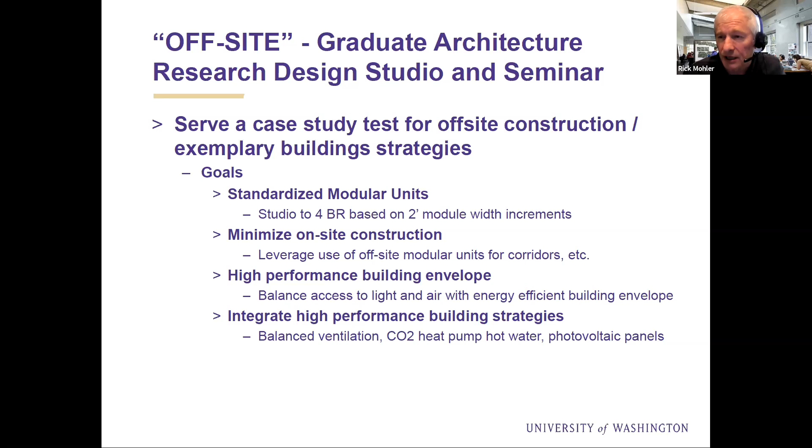And to integrate high-performance building strategies, including balanced ventilation, which provides continuous fresh air despite the fact that these buildings would have a very tight envelope, highly efficient CO2 heat pump hot water systems, and photovoltaic panels to generate on-site energy. We were pleased to have more than 24 participants, including affordable housing developers, architects, engineers, contractors, and modular unit suppliers.

This is a testament to the generosity of our broader community, willing to give their time and expertise to the education of these students. We had 12 students in the studio, and 5 of them, Alaena, Skyler, Stephanie, Kevin, and Juan, are going to present their projects here today, starting with Stephanie.

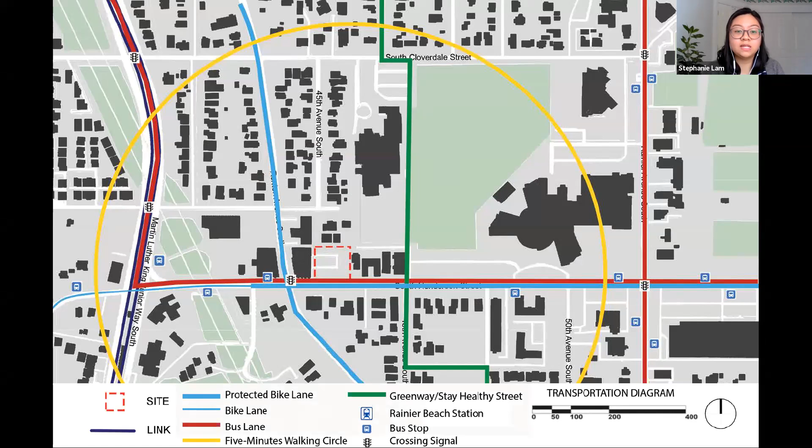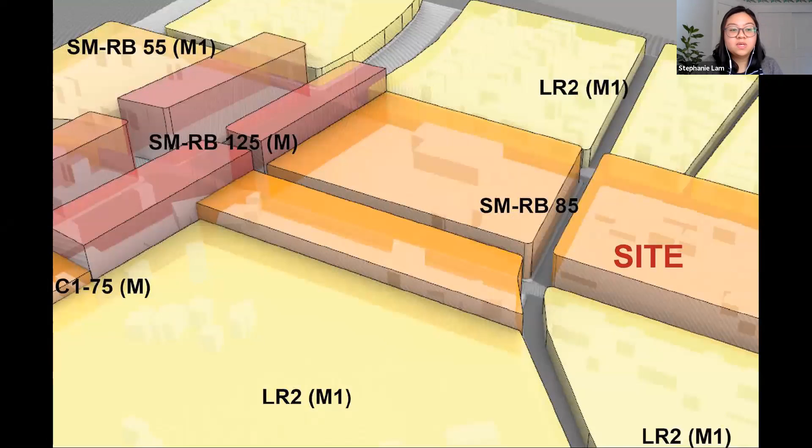Here are some views of its current state as an empty lot. The site's very close to the light rail with bike lanes along Henderson and Renton Avenue. Within walking distance, there are schools, parks, and a community center. The height limit is 85 feet with an FAR of 4.75.

It was important to provide places for the entire diverse neighborhood and a place working families can come home to. One of the big challenges was taking something standard, as Rick was talking about, modular construction, and making it unique to the site, creating more of a sense of place.

For my project proposal, it is about activating the edges, providing different opportunities for residents and for the surrounding neighbors. The next series shows some site forces carving out the max the project could go.

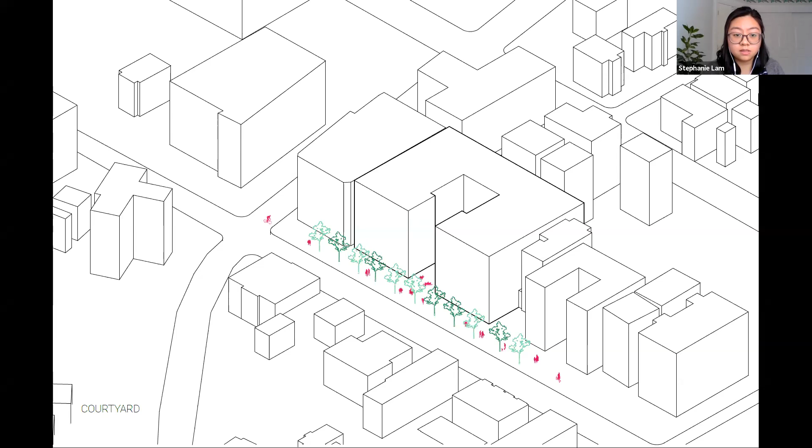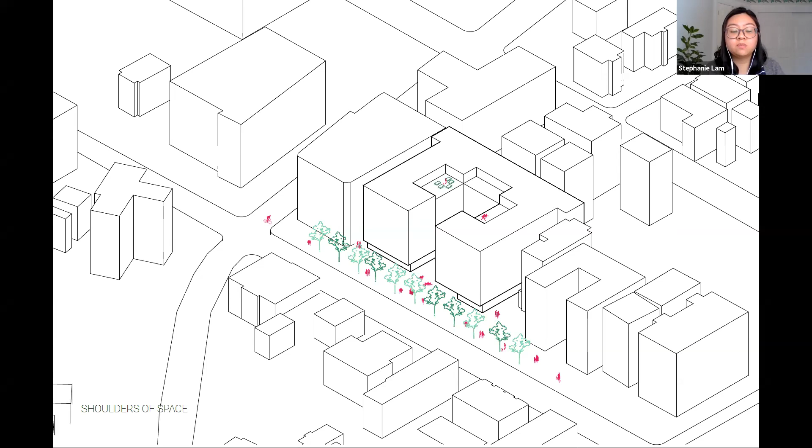Starting with the courtyard to provide open space and facing south for light, carving out the sides to allow light and air to the units, and then providing more intimate spaces on the rooftop and ground level.

For the studio, there was a constant back and forth between what happens above and below. At the ground level, there's more flexibility in where the community amenities and live-work units could go, and the overhang of the modular units above provided a covering down below for those spaces.

On the second level is a play area. Families can look into the play area from units above or as they are doing laundry, and units at this level can have a little space for privacy.

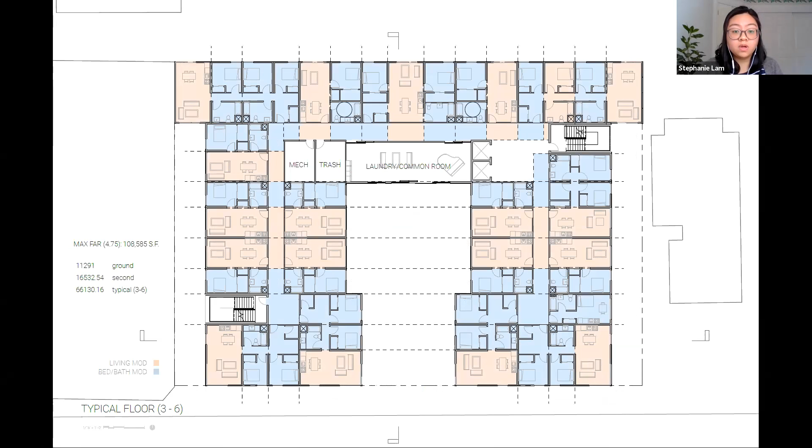For the units, the mods aligned in a way where there were 2 main mods, the living mods and the bed-bath mods, with the corridor included. Residents can also grow food in the community garden, which can support some of the businesses down below.

In section, you can get the sense of the floor-ceiling assemblies and how that might affect the overall height. In this section, you can also see the double walls, which also help with acoustics. It may be a little harder to break down the party walls for reuse.

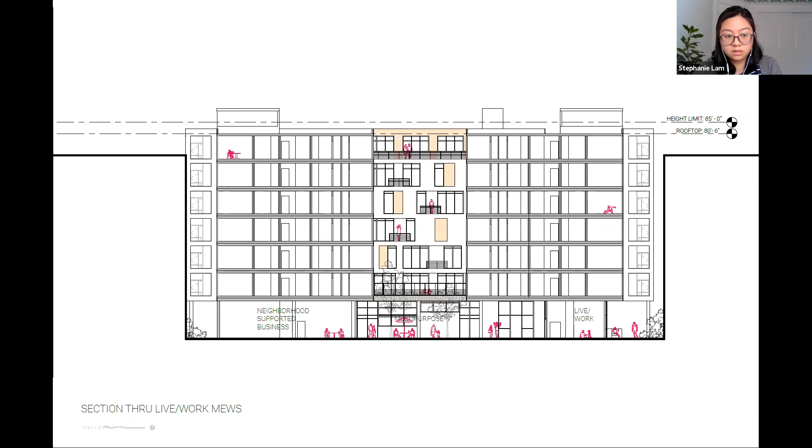In terms of elevation, there could be more opportunity to play with the facade elements and the proportion and patterns. It's also important to stack the units.

This shows what could be built on-site and off-site. The units above could be built off-site with a 54-foot long mod. The ground cores and podium can be built on-site, and flat pack elements of the common room could be shipped to the site.

For a tight air and water barrier, the exterior cladding could also be built off-site. As mentioned during review, it also helps to understand the manufacturing process, and in general, it would save a lot of time to frame and stack up.

Each mod includes these layers. There are mainly 2 window sizes, one for the bedroom and one for the living area.

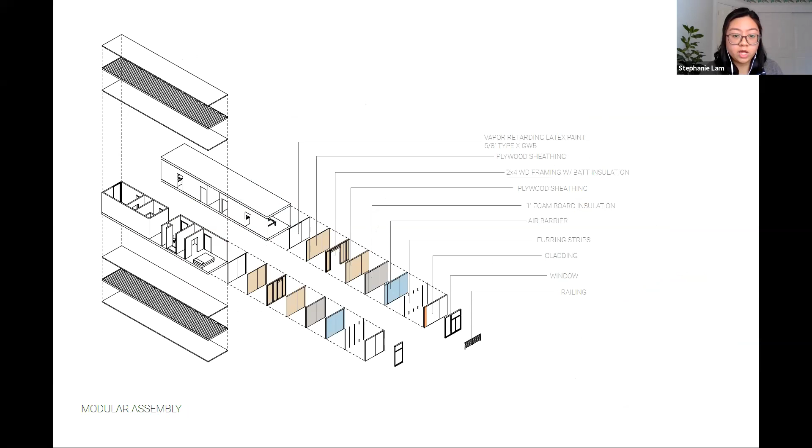The studio unit starts with a 12-foot by 24-foot mod, considering that the stud wall is spaced at 24 inches on center.

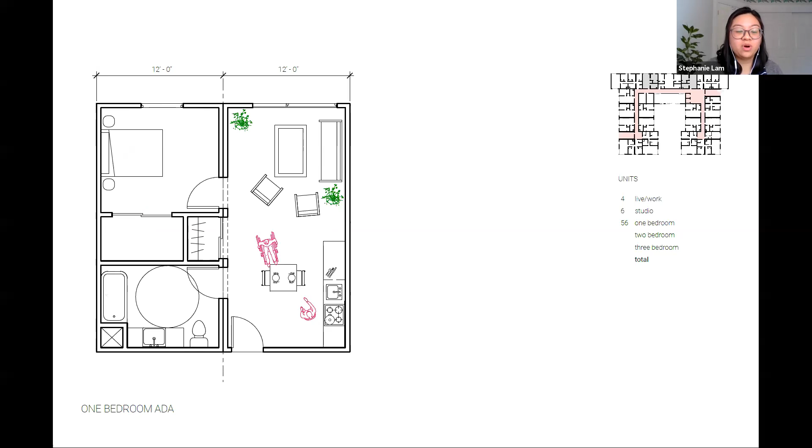For one bedroom, another 10-foot modular can be added next, or expanded to 12 feet for more space. There are mainly 2 types of 2 bedrooms. This is the corner with the living expanded to 14 feet and the bedroom expanded to 12 feet to provide more space.

And compared to the infill, these are for the units in between. And as the units grow, the bedroom sizes also grow to accommodate bigger families.

Each unit type has its own unitized energy recovery ventilator, allowing residents to have their own supply and exhaust of air. A lesson learned is that it could be placed closer to the corridor if it's unitized, for ease of access in future maintenance.

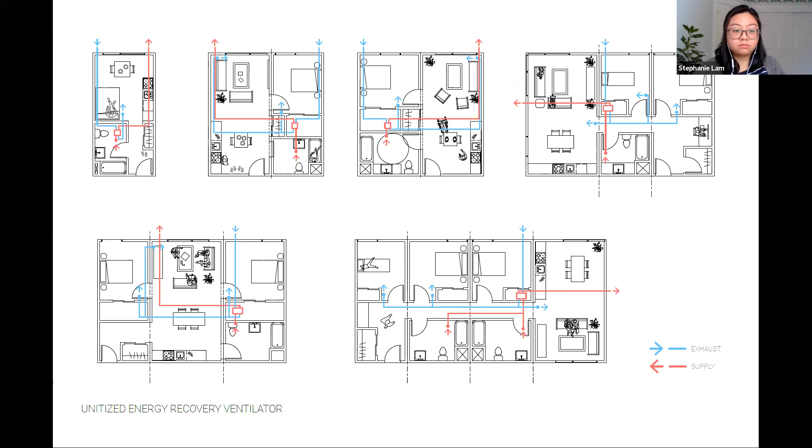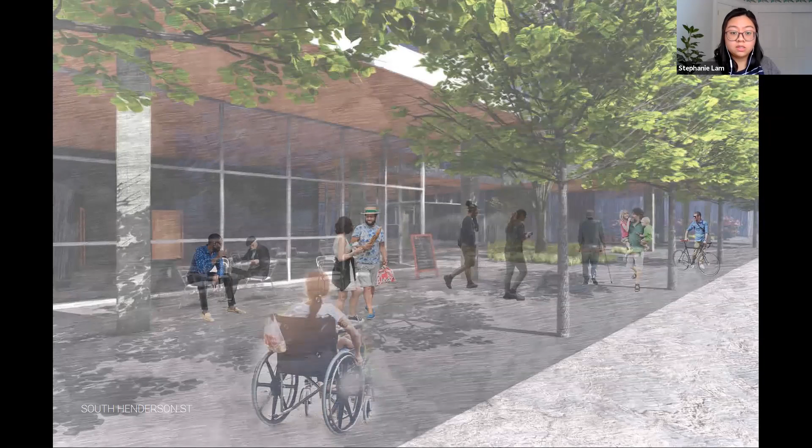Playing in the play area. Walking along the mews. Working in the covered workspace.

Up on the rooftop. Overall, the biggest takeaway is to consider collaborating with a team from the get-go, and understanding the manufacturing process is also important from a cost and time standpoint. Also finding the balance, or at least thinking about how to be most efficient with the use of space and creating a sense of place, which you'll see more in the next few projects.

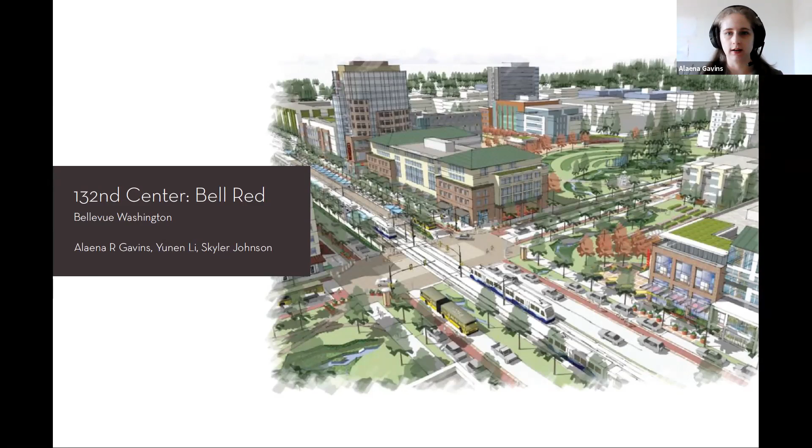Currently zoned as industrial use, the new light rail expansion has prompted new redevelopment to transform the area into a mixed-use urban area, and to reconnect nature through reestablishing creeks, rivers, and parks within this urban area.

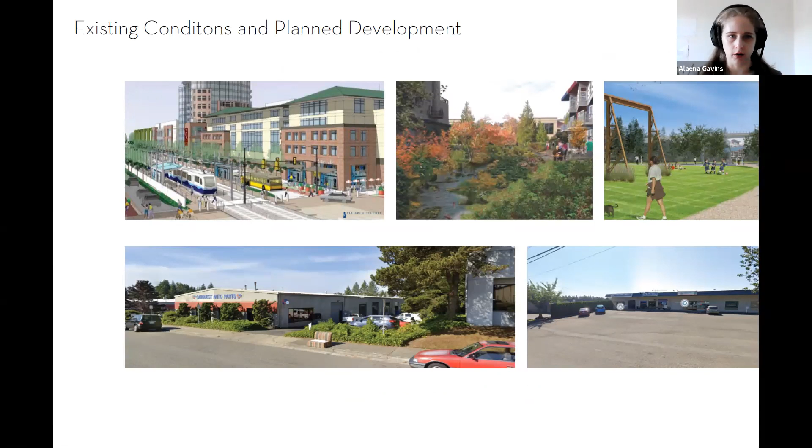The anticipated zoning on our site allows for up to 150 feet of construction, but our project, due to the construction type, was actually built shorter, roughly 80 to 95 feet. Most of the buildings to our south are still zoned for building heights shorter than what our project proposed.

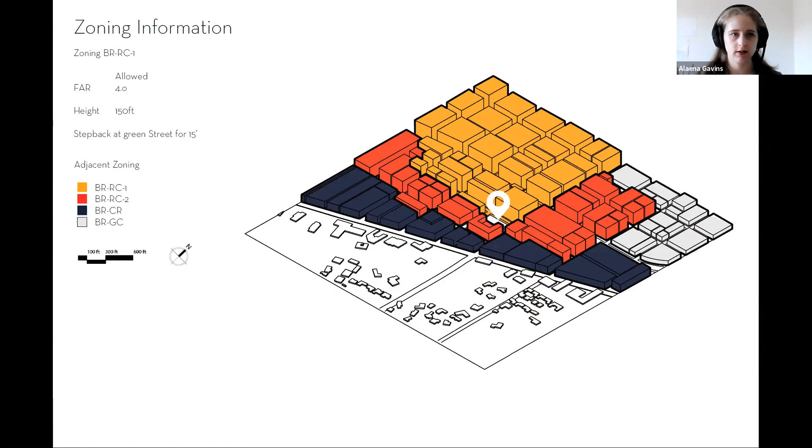The proposal that I developed was actually called the Belleville, and the main goal of this proposal was to deinstitutionalize the process of being and living in affordable housing.

This is achieved 3 ways: breaking down the massing through urban design techniques, reducing formality through window size and placement, and through a focus on community and the quality of space.

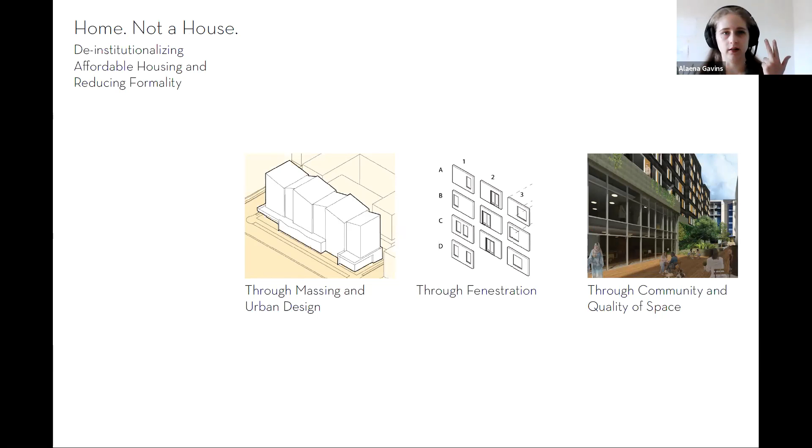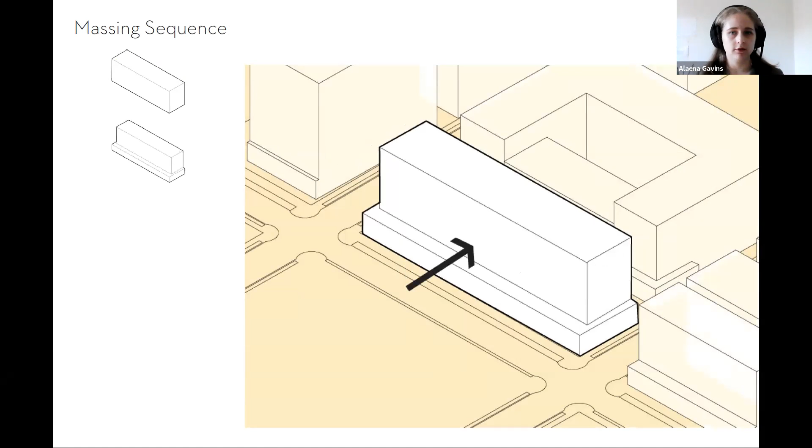Starting with the massing, it's a basic form of a bar. This is then pulled in 15 feet above to reinforce the green street.

This is then broken up through pulling in segments of the mass, and reinforcing these segments through roof variations. Lastly, the podium is articulated to enhance the experience of pedestrians walking by.

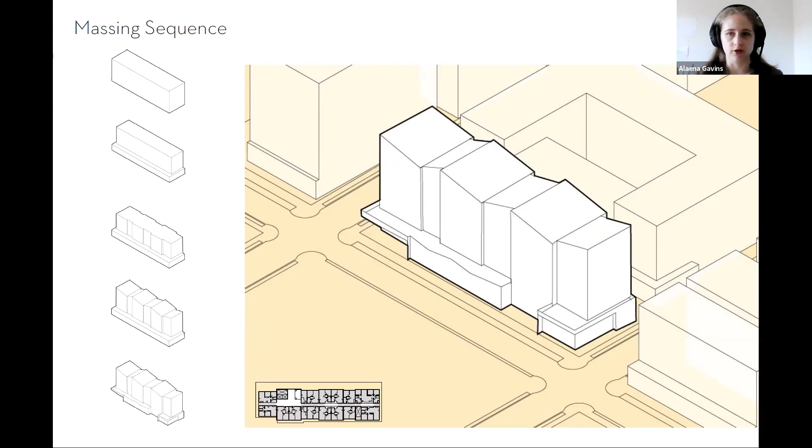These strategies combined create an informal feel to the exterior. The construction is made up of 3 parts.

The podium is made up of concrete, which is site-built construction, differing from the body, which, as with Stephanie's project and the rest of the projects, is 100% prefabricated modules. In this case, the articulated roof is also prefabricated, but it comes to the site in parts to be assembled.

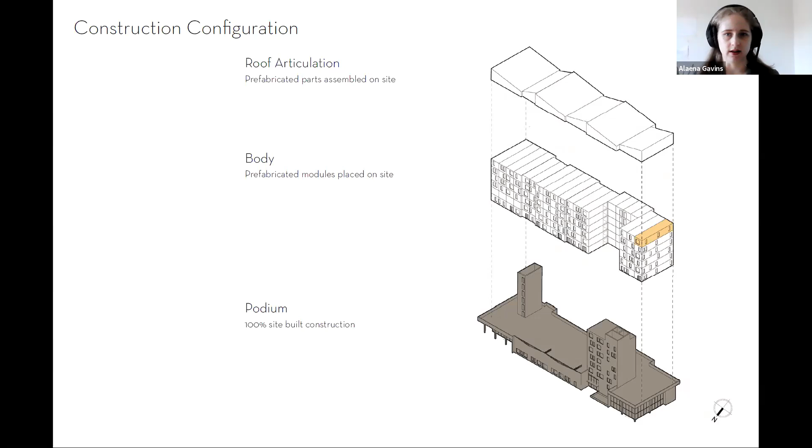Taking a closer look at one of the individual prefabricated modules, the exterior window wall, you can see it's notated A, B, C, D, 1, 2, 3.

What that does is it allows the window wall to be swapped out for another unit to create a varied look on the exterior, which would break up a potential grid of windows—using the modular technology to create artistic variation.

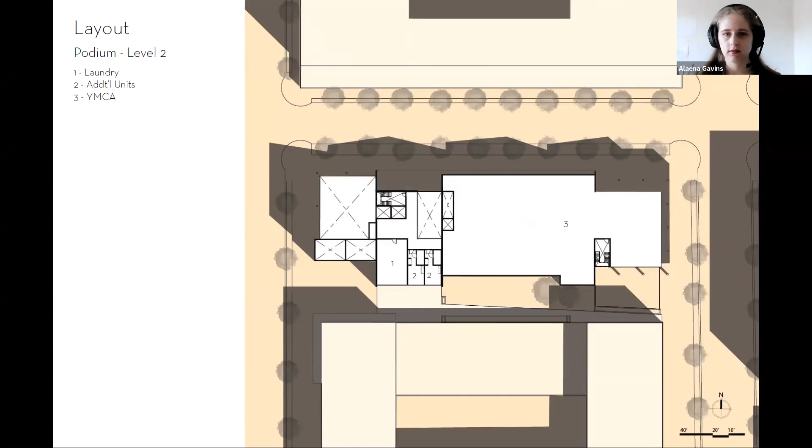Above is largely similar, with the addition of 2 units and a communal laundry space. Then on the 3rd floor and above, these are all apartments.

On the 3rd floor, these include private terraces, but then on all of the levels, there is a small community breakout area for resident use.

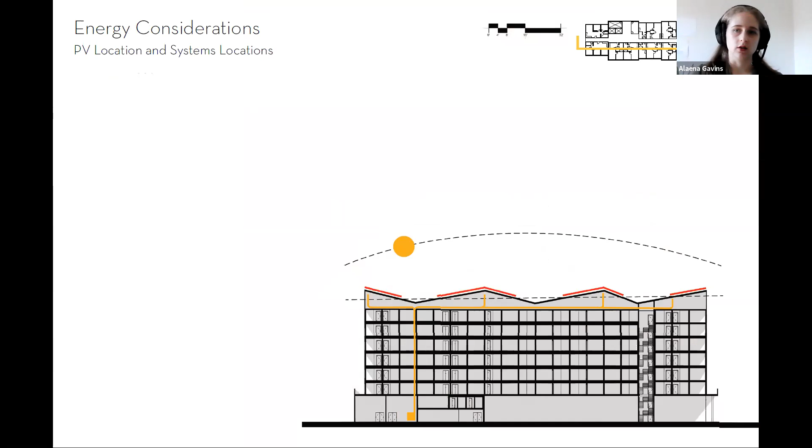Some of the key considerations for exemplary building program focus that we had was including solar, which is located on the peaks of this articulated roof.

Another consideration was the energy recovery ventilation. Unlike Stephanie's proposal, this consolidates the ERVs into 3 central zones, maintaining redundancy while reducing the number of ERV units.

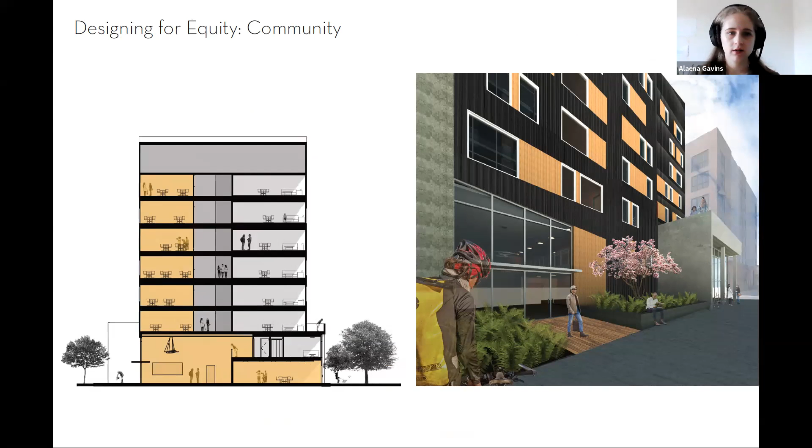Lastly, this proposal is defined through equity. There is a continuation of resident public space from the entry, through to the lobby, and out to the extended community space of the mews.

Notably, all of the units in this proposal are standardized ADA units, to ensure that those who need ADA accommodations can have them.

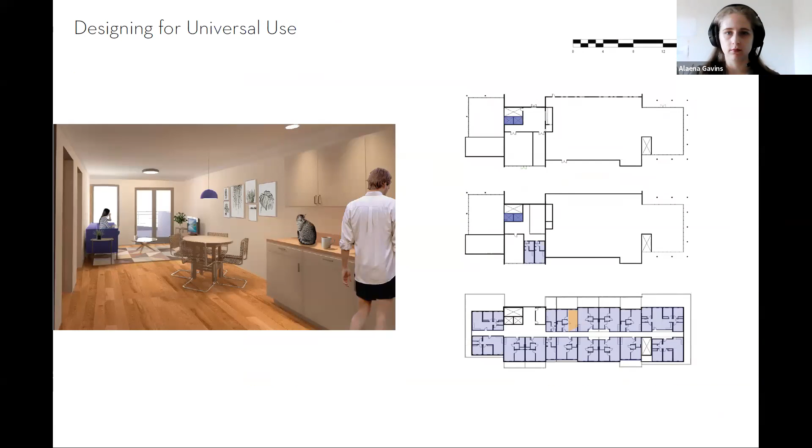While there is the inclusion of 2 and 3 bedroom units for larger families, the majority of the units are 1 bedroom units, for a total of 99 units. This is actually just under the initial architectural proposal that we started with.

Here's the studio plan, made up of a single module. And then these are the variations of the 1 bedrooms, which are each made up of 2 modules.

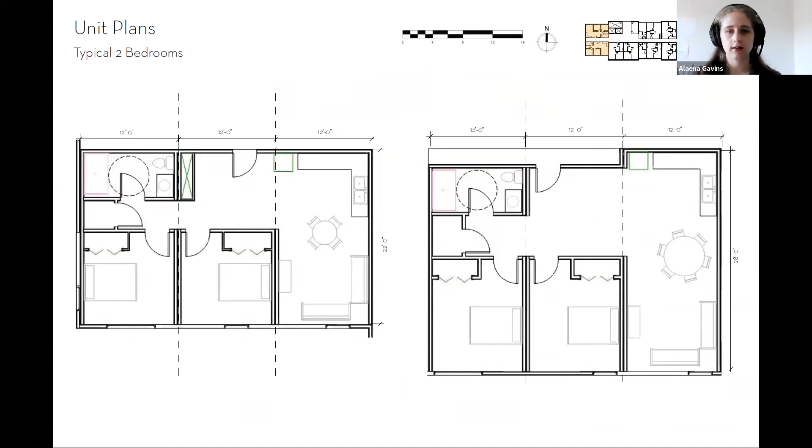And then the 2 2-bedroom units that we have. And lastly, the 3-bedroom unit, which has 4 separate modules.

All these considerations lead up to a proposal that redefines affordable housing and what that experience can be. Thank you very much for coming, and I will pass it on to Skyler.

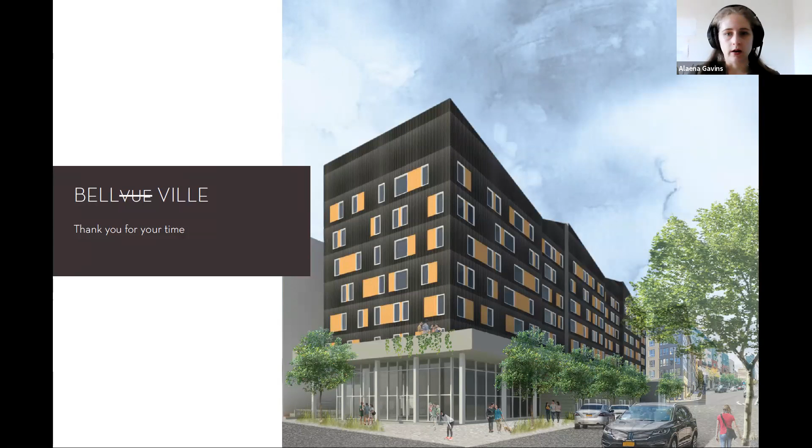Hello, everyone. Thank you for coming today. My name is Skyler Johnson, and my project is at the same site as Alaena's. It's aptly named the 132nd Bel-Red Mod.

I wanted to investigate how modular construction could find efficiencies in the standardization and how to channel those savings into ideas that would give back to the residents. My proposal accounted for nearly the same amount of units as proposed by the developers previously.

The rectangular massing is derivative of the zoning setbacks and stepbacks from the Green Street corridor, as well as to provide adequate space for the private mews between the other residential building.

Entrances were pulled off the street to highlight the primary uses. The lobby extends through the building's width to provide a feeling of transparency from the Green Street to the private mews, and the community room and the YMCA are also pulled back.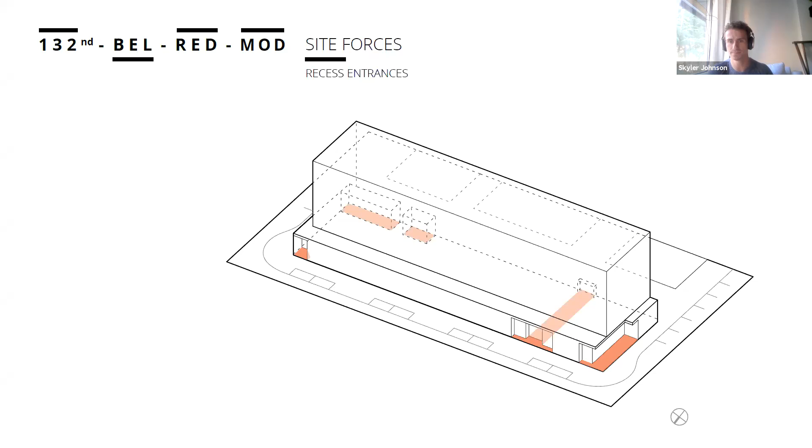The building envelope would be drawn back to the vertical circulation, like the stairwells and the long corridors, providing access to light to the transitional spaces.

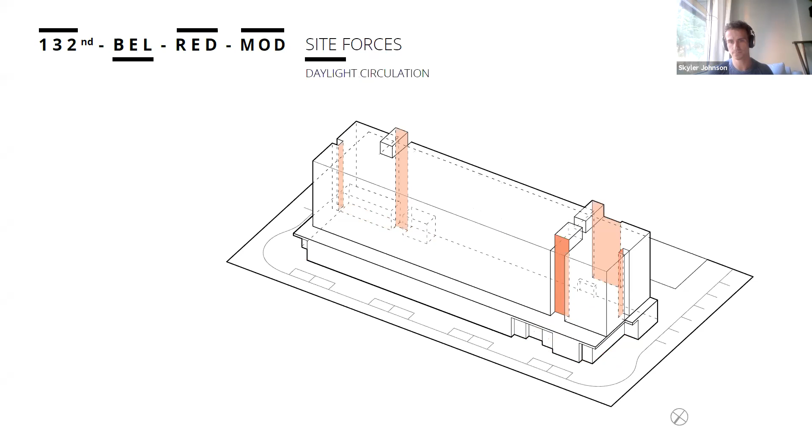Beyond the site forces and zoning, the concept for the building is derived from primary chunks that would be carved out of the massing, leaving exposed bright insets.

Locations are chosen in a way that would reveal the modularity of the project, and the colors selected are bright earth tones.

Each inset would be anchored by a community module implemented on each floor, drawing residents through the building, thus encouraging the development of a sense of community.

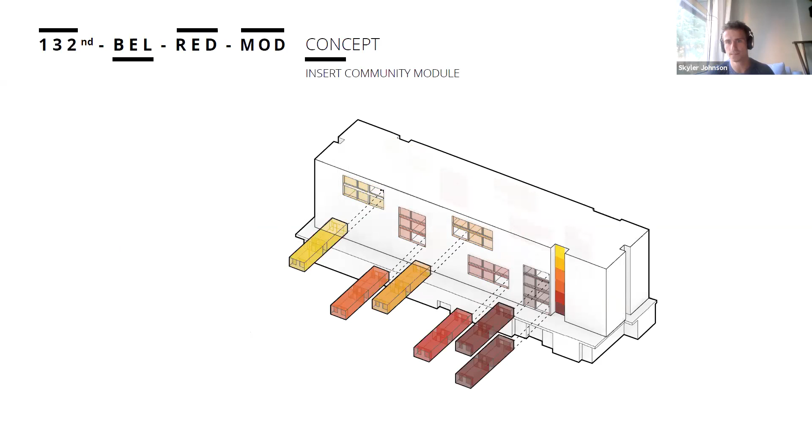Communal balconies and outset window frames would create a secondary articulation on the building's exterior character.

At the ground floor, the building's lobby projects from the green street through the width of the building, forming a relationship to the private mews. Residents from this building and the one to the south can spill into the green space at their leisure.

Enclosing the space on either end is a car park to the west for trash and mechanical services, and a children's play area for the YMCA to the east.

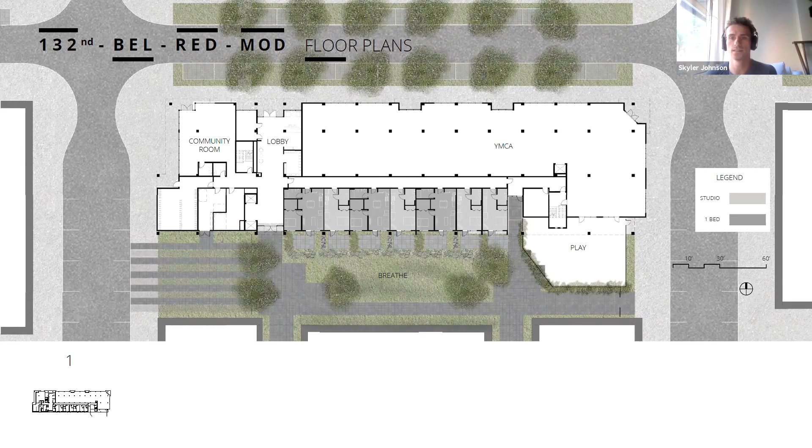The concrete podium will include the second floor, and floors 3 through 8 would be modular construction.

As we rise through the building, the community modules take the place of studios, allowing light to penetrate into each corridor. This is showing where the laundry room might be, having access to the outdoor patio space while residents wait.

Residents can build connections in these various community modules with others who take part in these daily activities, including interests like reading, gardening, or just taking time to be alone and be productive.

We had the ability to have deeper units by extending further into the mews, but chose not to, for the purpose of maintaining unit size efficiencies and to allow light to penetrate as deep into the outdoor space as possible.

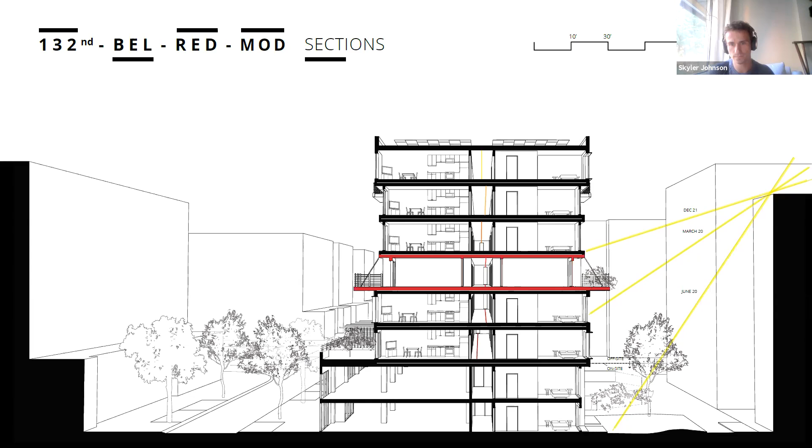Like many of these other modular projects, it begins with a concrete podium that's built on site. While the site is being prepared, the units and community modules would be constructed off-site and shipped to the site. After being installed, minimal work is needed to finish the exterior of the building, such as the cladding shown here.

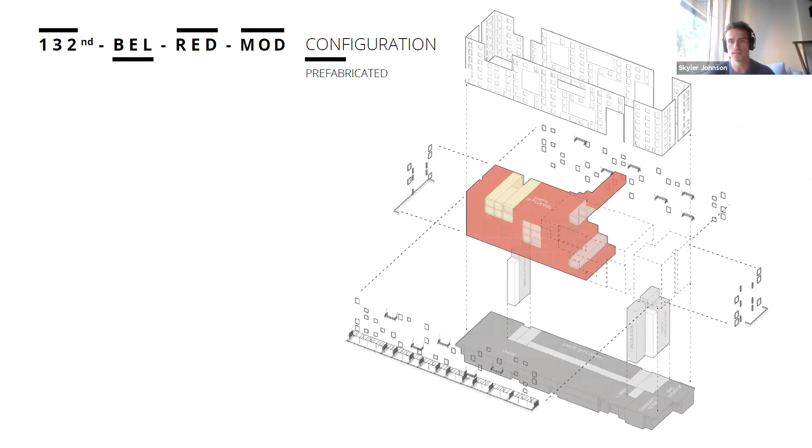Additionally, prefabricated balconies, trellises, and window frames would be bolted onto the exterior. And that shows it in its completed state with minimal update.

The layers here are shown what would be installed off-site for each module. And the next slide adds the final couple layers that would be attaching the cladding.

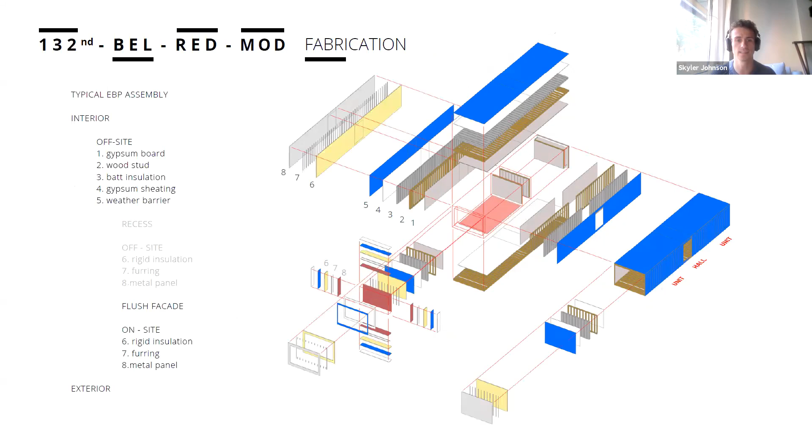This is the studio unit, and it is 14 feet wide by 24 feet. And the ADA units are a bit longer at 26 feet.

The one bedrooms are a combination of a 10-foot bedroom and a 12-foot living room. And the ADA version has a wider living room, which is just one of them located on a corner unit to maintain a standardization for the rest of the units.

And the 2 and 3 bedrooms include a 14-foot wide living room located at the other 3 corners.

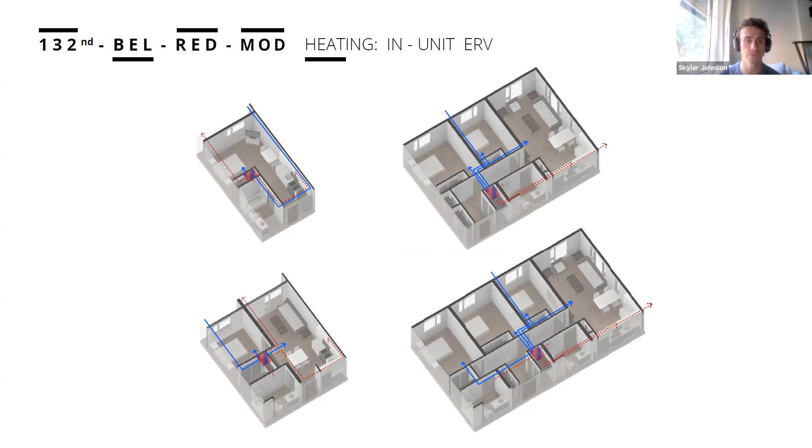Like Stephanie's, this project would use an in-unit ERV system for heating. And as we learned, we want to move these potentially closer to the corridors to allow maintenance to them without having to go into each unit potentially.

These are additional systems like domestic hot water and roof solar panels.

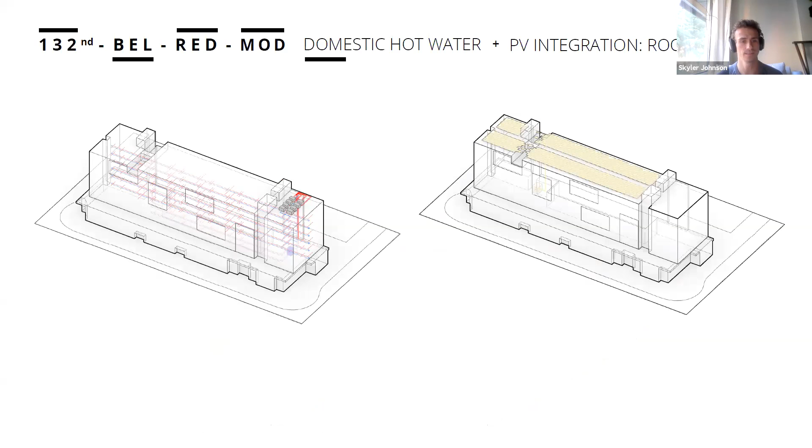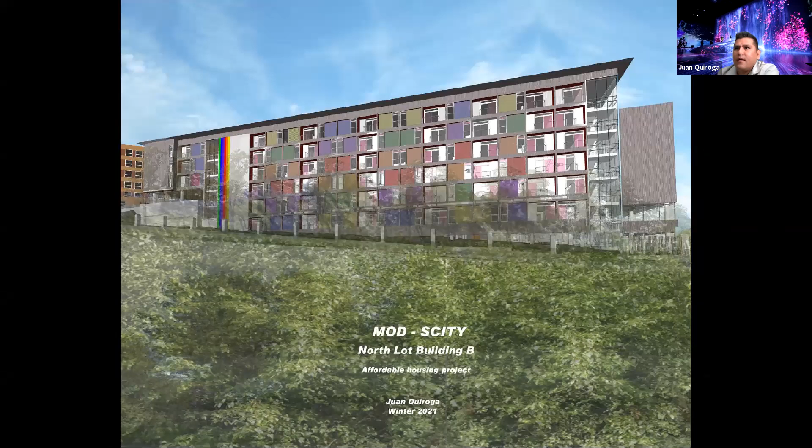And this is my project. I named it Mod City.

Mod City is located on Beacon Hill, Seattle, near I-5 and I-90 freeway. It has a privileged location for its views over downtown Seattle.

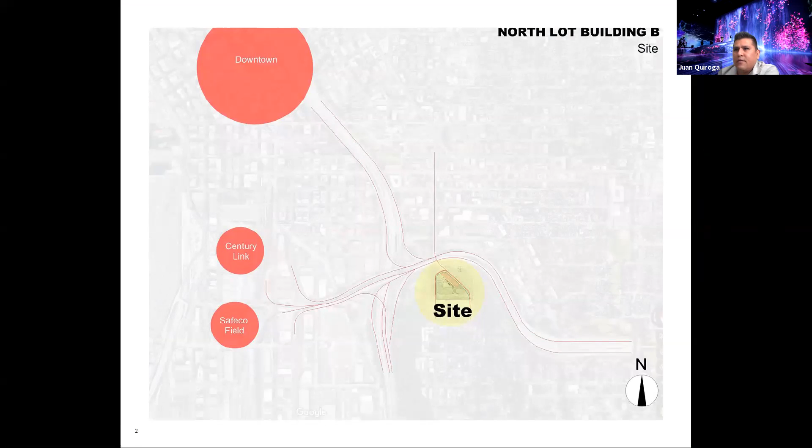Mod City offers multifamily modular housing that counts 5 types of units, from studio units to 4-bed units. This project proposes 90 units total within a maximum height of 6 and 7 floors.

This is a perspective view coming from the I-5 freeway, looking at the north side of the building. As you can see here, the characteristics of the project are to emphasize the views. You can also see the building height and its relation to the context.

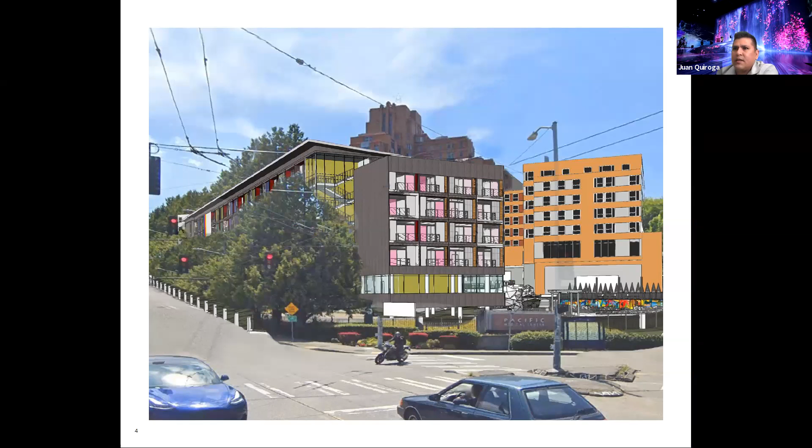The project is a complex of 2 buildings, A and B, and my work intervention is especially on building B. Building B in its program is primarily residential units.

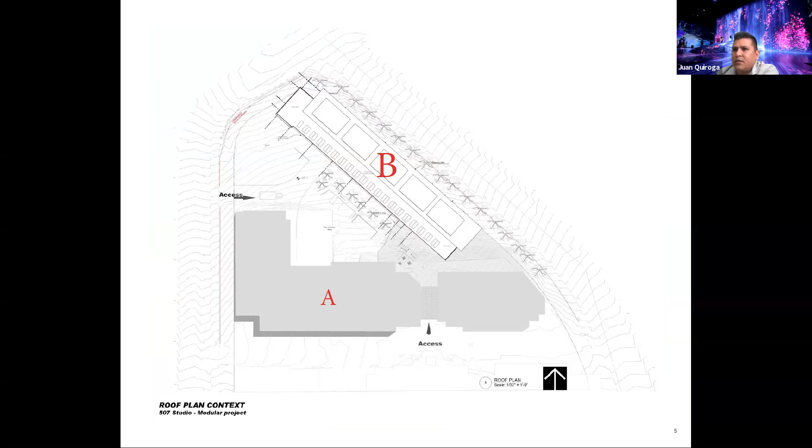One of the characteristics concerning the site and location is the views and visual connection to its immediate context. The principles leading this project are inclusion and diversity, visual connections, and sustainable strategies.

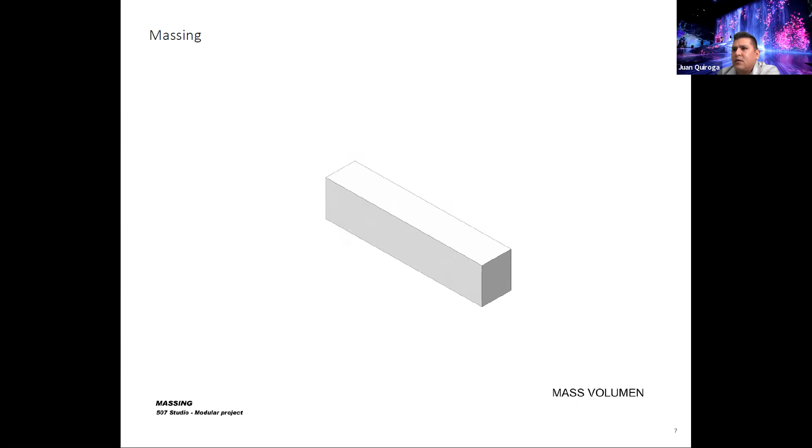This is how the building evolves to its final volume, starting from a long bar massing to a single double-loaded corridor building.

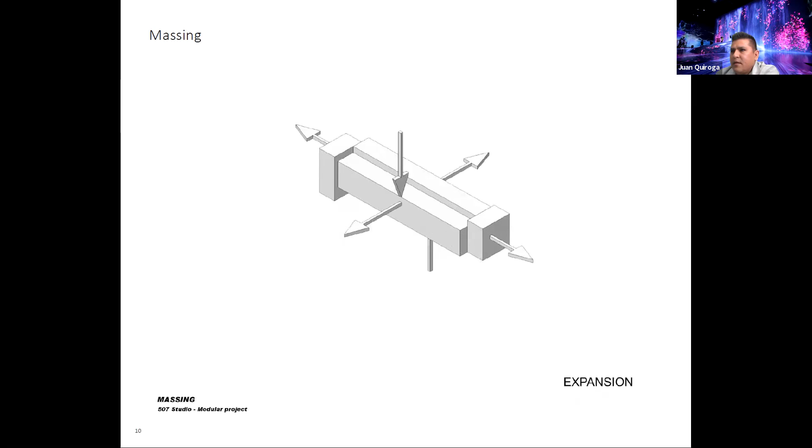These movements - compression, contraction, expansion, and finally connections - result in this schematic floor plan that represents the building's overall organization.

The project achieves a multi-directional view from all the units. The modularity design and flexibility allow accommodating the long bar mass building units in its 4 directions, which at the same time provides a sustainable natural illumination and engaged visual integration to its context.

The main component of the building is the modular boxes stacked accordingly to the apartment type. Mod City uses boxes of 12 by 28 feet.

As you can see here, one box is a studio and an addition box makes a 1-bed apartment, and so forth. The layout plan is straightforward and the stacked system facilitates all the required installations.

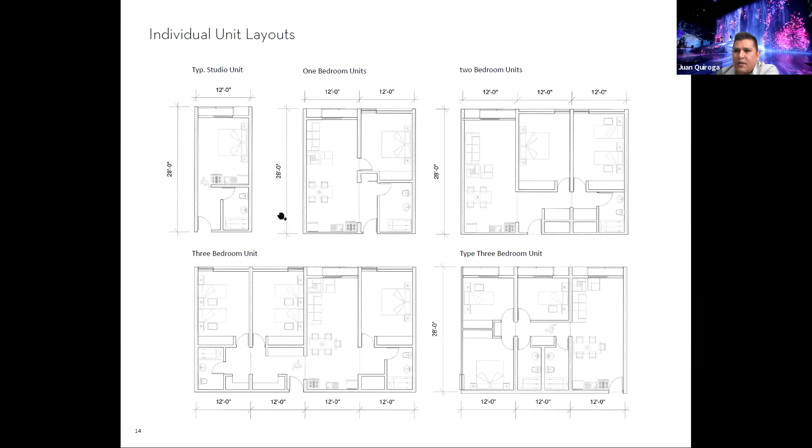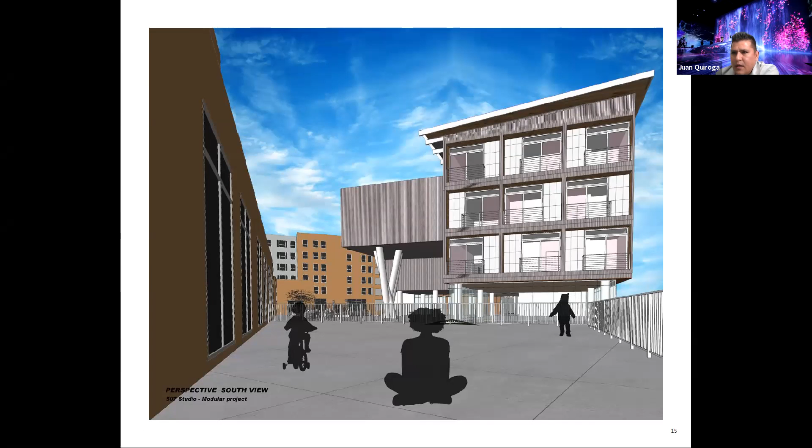This is a perspective south view in which you can see part of the main entrance, double-high hall, and apartment units facing north.

As mentioned before, the modular stack system allows an efficient centralized recovery ventilation system.

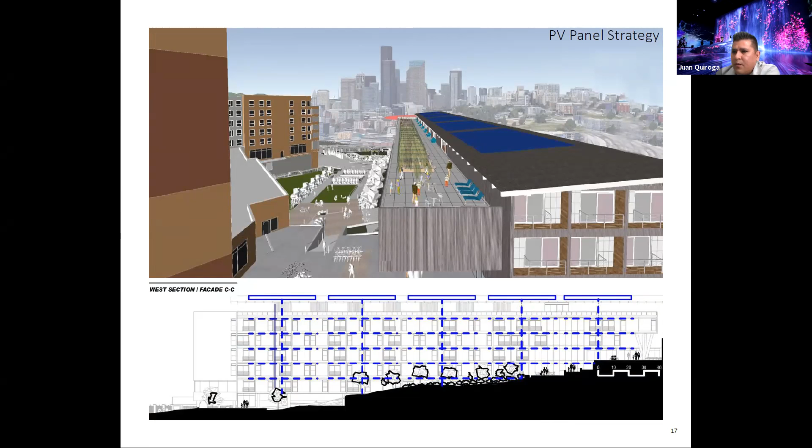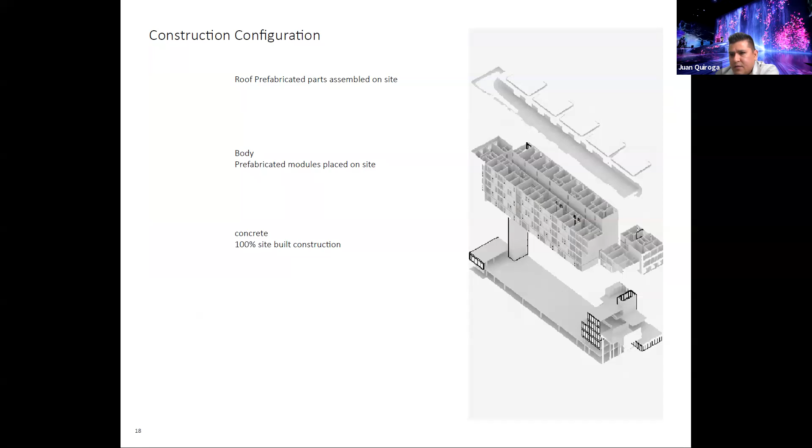Allows flexible strategies for water recycling, solar PV energy installation, and rooftop communal gardening. On the other hand, a significant contribution of the modular system is the construction configuration, allowing off-site construction and reducing on-site construction.

The following pages are the final floor plan configuration of all levels. All unit types correspond equally to each floor. This first floor is 90% open and free, allowing visual communication and courtyard engagement.

The second floor has 4-bed apartments, laundry and community room. The third floor has studios, 1, 2, and 3 beds plus amenity spaces. The fourth floor is the main entrance, emphasized by double and triple height spatial spaces, with studios, 1, 2, and 3 bedrooms.

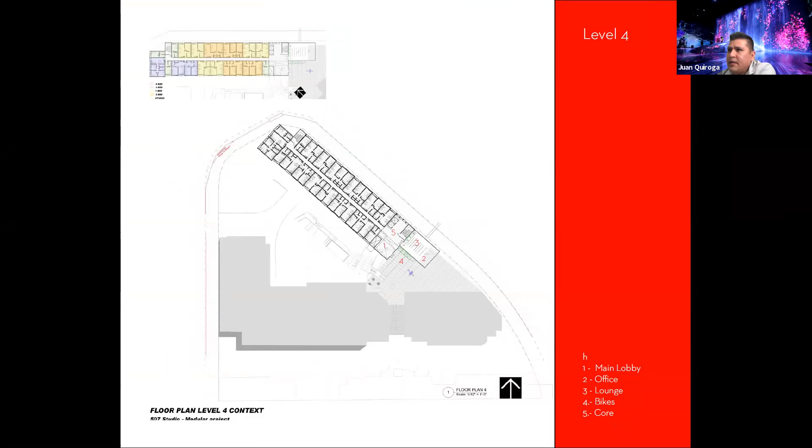Fifth and sixth floor are typical floors, and finally the 7th floor has studios, 1, 2, and 3 bedrooms.

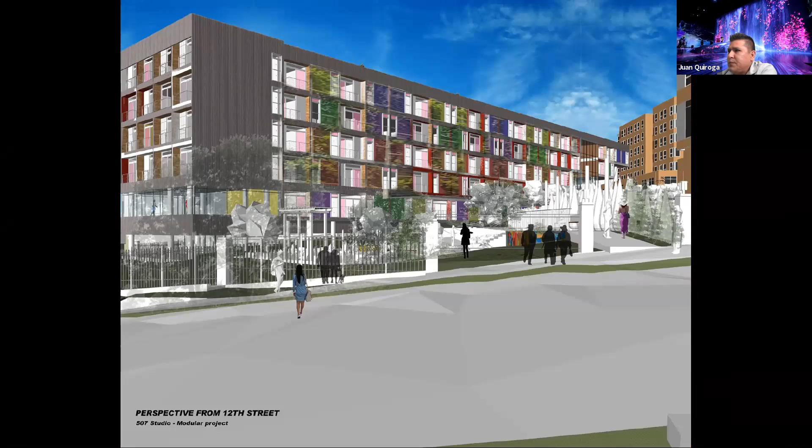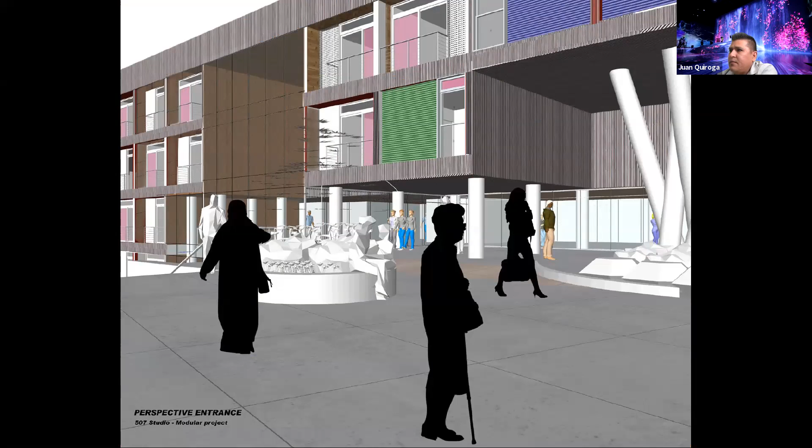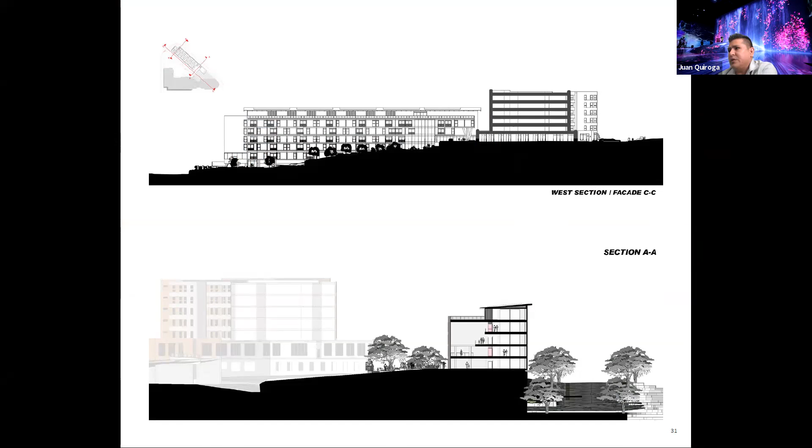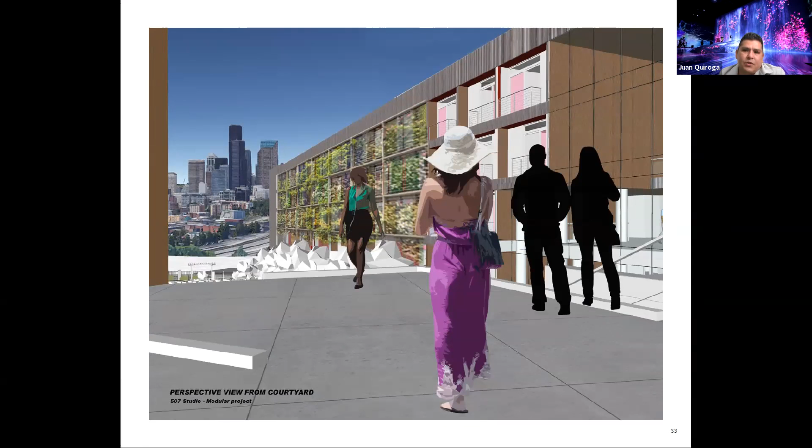The mod city is designed for a diverse community, transmitted by the color choice that expresses a plurality of cultures. Thank you, and I will pass to Kevin.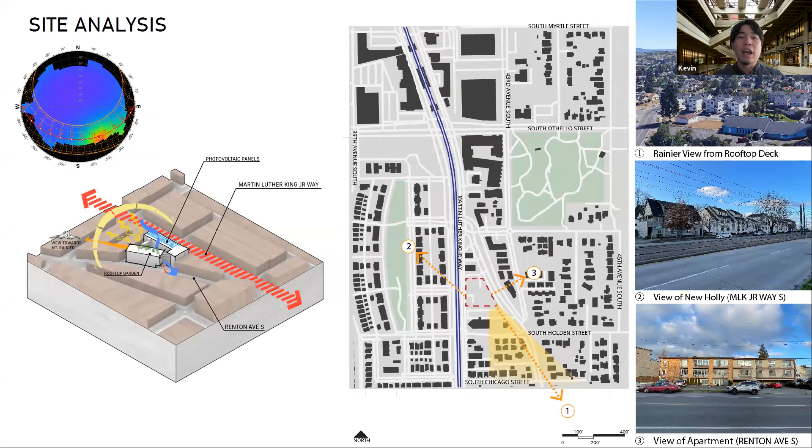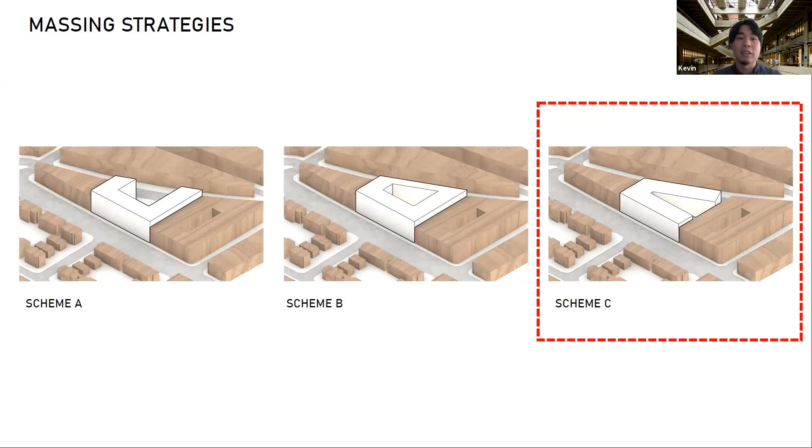The following slides show a sequence of the massing strategy, starting with a simple extrusion of the site. Then the strategy was to cut the volume to create a courtyard, exposing natural light and southern sunlight into each unit. Then we trimmed off the corner to create a right angle condition, simplifying the volumetric modular process. Finally, setbacks were allowed for corner units to get ample light.

And then there's the insertion of the community nest that secures the 2 bars together.

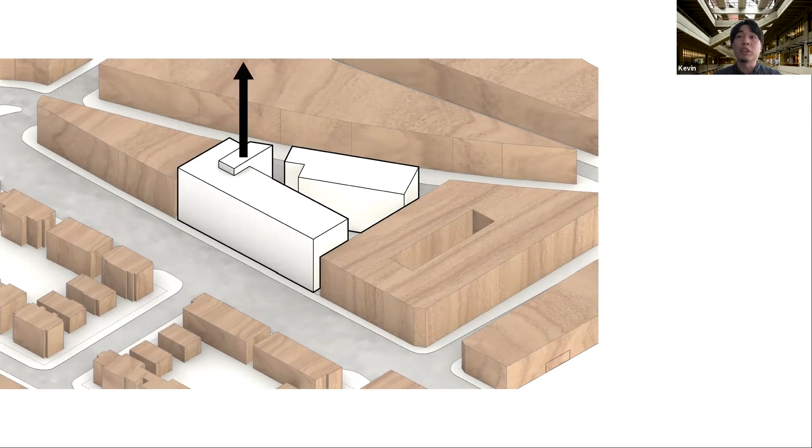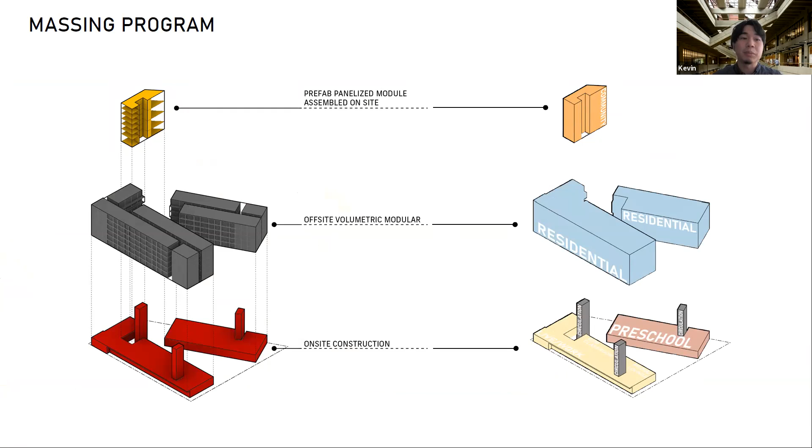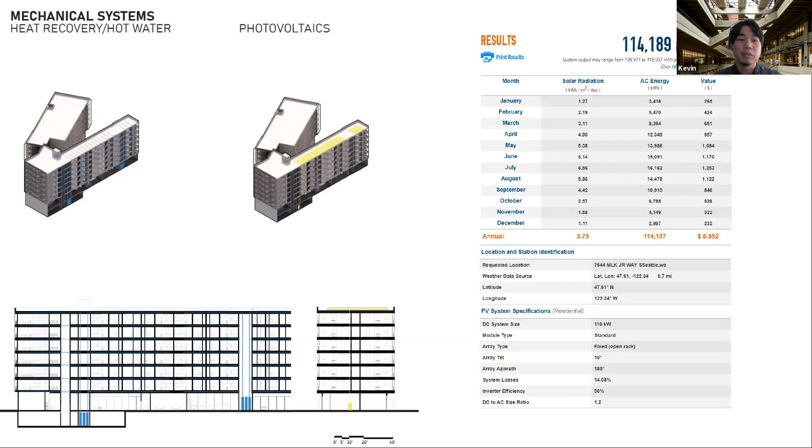The unique construction of the volumetric modular units creates duplicate floors and ceilings, creating a 3-inch height gap between each module, benefiting it with high sound and energy performance, which is great for big families, what we're targeting for this project. This idea of equity continues with a 2-foot small bump out for a balcony in each unit, connecting each unit with the outdoors.

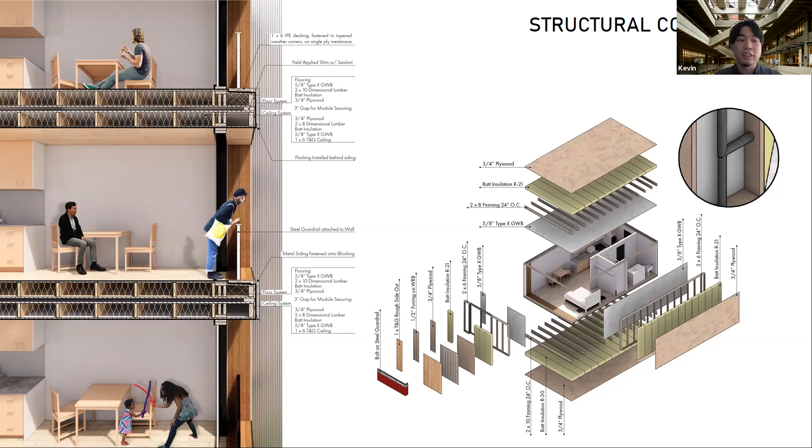All washer and dryer units are located in the community space. The following are just some unit types: studio, 1-bedroom, 2-bedroom, 3-bedroom. All units are made out of a 10-foot or 14-foot module for easy alignment between unit types.

As previous projects have mentioned, the advice we received from specialists was that the individual ERV units should be located closer to the corridor for easy access.

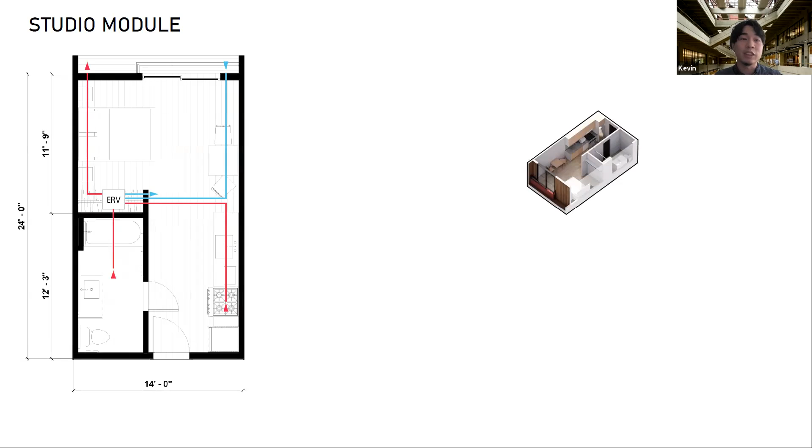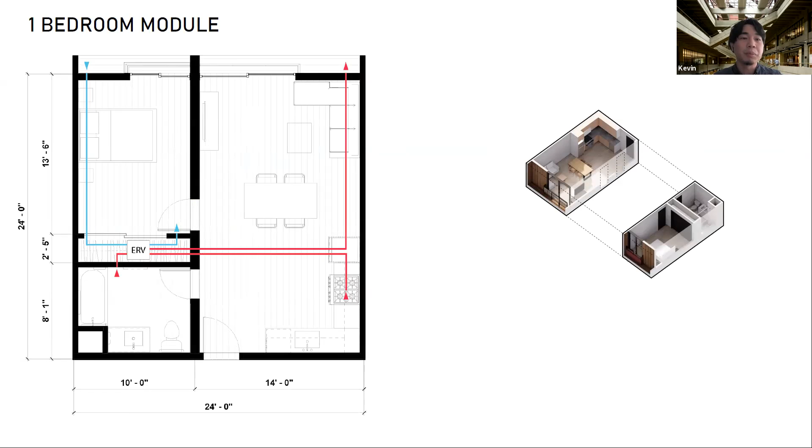For the 2-bedroom units, you have an extra 10-foot module tacked onto it. The uniqueness of the 2-bedroom units is that they're spread across the plan. Here you see this shaft space, right at the right end, which brings the amenities to each floor.

And this is a 3-bedroom unit, which is located at each corner end.

From the floor plan, you can see that all the modular walls are stacked and aligned for fast and easy installation. By breaking the V-shape into 2 volumes, this project was able to maximize the amount of 3-bedroom units to 20% of the total unit count. All of them are corner units, allowing 2 phases of solar exposure and ventilation.

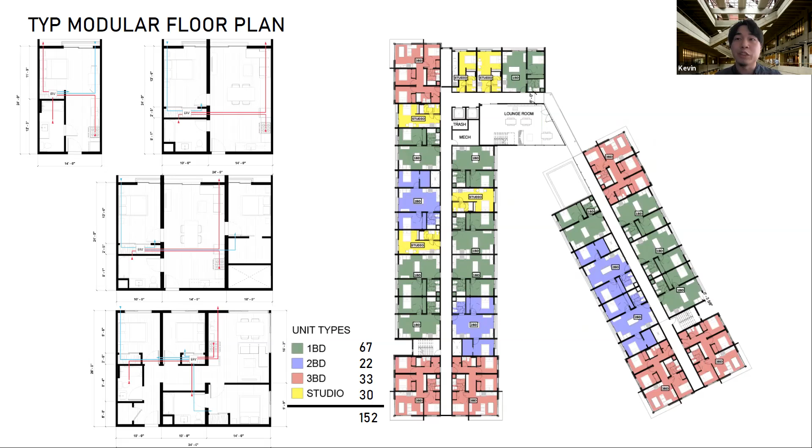The 2-bedroom units here are spread across the plan to allow for equal distribution of the shaft space previously mentioned.

This is a view from Renton Ave South, where it shows a community mural engaging the pedestrian realm. You can see that the community nest is revealed, welcoming the tenants back home.

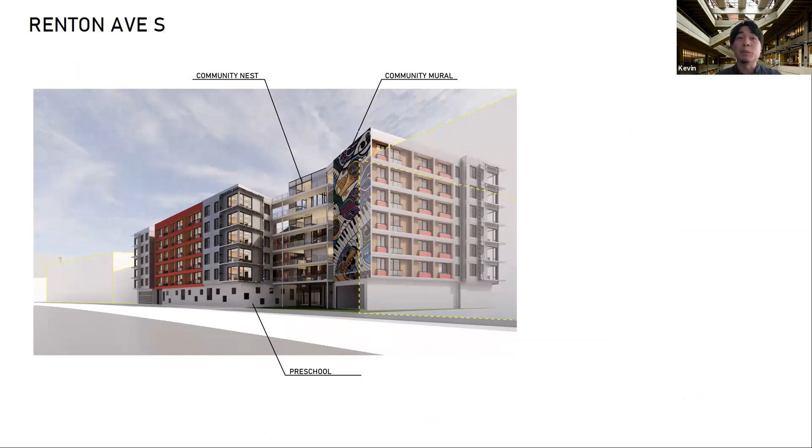Here I'll talk briefly on the community nest. To create a sense of place for the multiple cultures—sorry about that—to create multiple culture programming aesthetically, inspired by different cultural patterns that are prominent in the neighborhood of Othello.

The community space makes use of the weaving nature of these cultural patterns, and that forms the facade of the space.

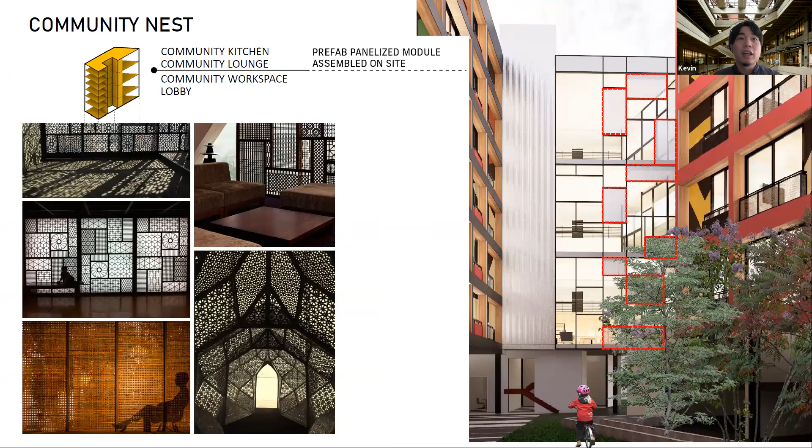Here you can see the community tower being a combination of a shared workspace, lounge, library, and community kitchen, really trying to mingle together and create these connections that we were previously talking about.

As you can see, each of these pods of community space are double-heighted spaces for these programs, and this creates a release from the unit spaces and also space for new relationships to grow. You can see that it's a community space combined with the laundry room on top.

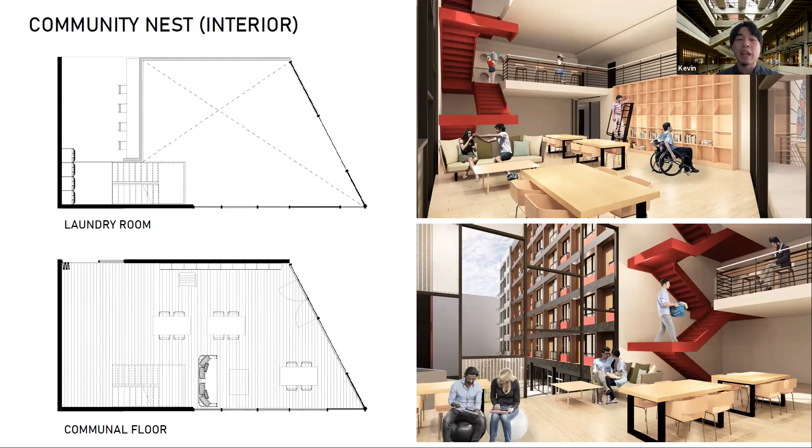Thank you all for the presentations. Just some quick takeaways from the studio, a lot of this came from the many guests we had in both the studio and the seminar. These are related to process. As Stephanie mentioned, it's critical that one collaborate from day one—you really need a full project team, including the developer, architect, consultants, modular provider, and general contractor, engaged from the outset of the project.

One has to have realistic expectations. Modular construction will not cut costs on the first project. As our friend Ryan Smith at WSU has noted, it typically takes 3 projects with the same team before one really starts seeing substantial reductions in construction costs.

We found that there's an interesting, not so much a conflict, but a misalignment between the goals of the high performance building envelope and the mandate of modular construction. For example, the Offsite Construction Task Force, which is focused on modular construction, is really looking at the production necessities for these modules, whereas the high performance building envelope team, the Exemplary Buildings Task Force, is looking at what is the optimal building envelope with light frame construction. Very often it's the engineering and production of the modular units that drives the framing, not the efficiency of the building envelope.